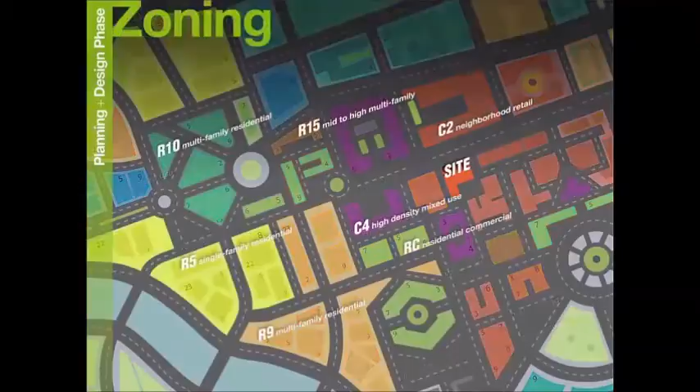We analyze existing architectural forms, the scale of the building, how it relates to the city and pedestrians, and existing infrastructure like transit and utilities.

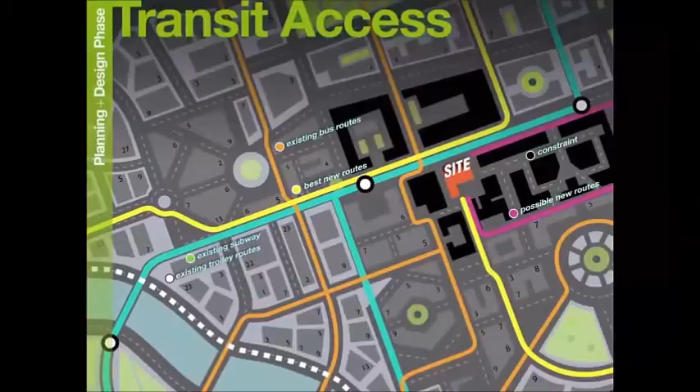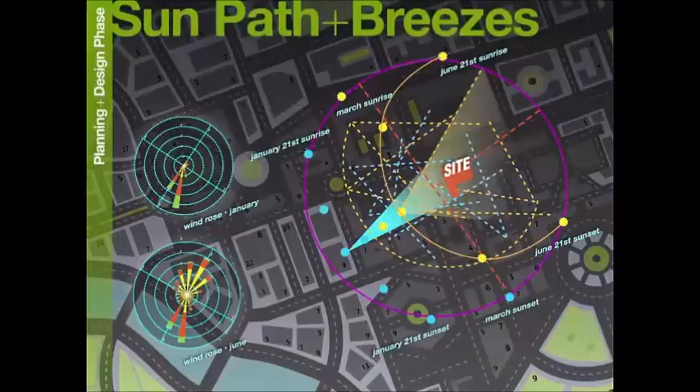We study all lines of sight and overall visual impact to enhance user experience. We consider how sun path strongly influences orientation of the building to maximize daylight and minimize operational costs.

As we determine the orientation of the building and begin developing a design, we carefully consider how people will experience the building, circulate within it, and get out of the building.

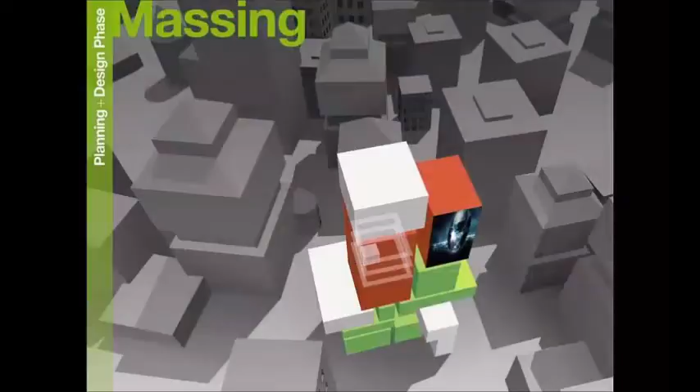We develop numerous conceptual designs to fully explore possibilities, while considering a wide range of building science issues like water management, keeping water out, directing it away from the building, and potentially reusing it for the surrounding landscape.

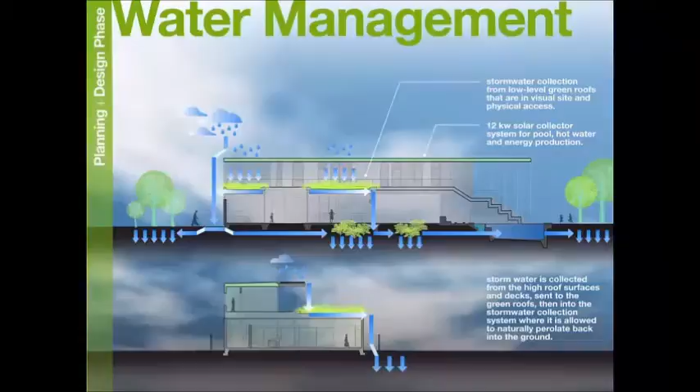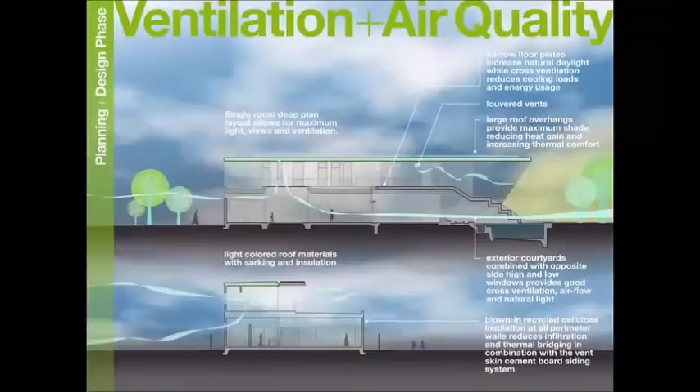We analyze wind loads, seismic activity, handicapped access, and other factors that directly affect the health and safety of the public. We work to capitalize on prevailing winds, airflow, and air quality, as well as maximizing daylight to lower operational costs.

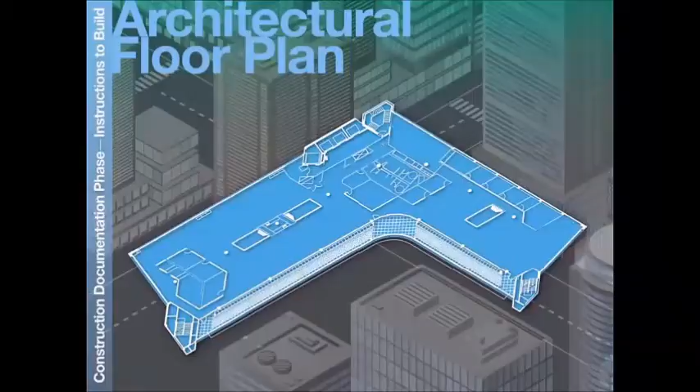We integrate technologies that will complement the efficiencies of the design. To construct the design, we prepare comprehensive documents for the contractor and for obtaining all required approvals. These start with the architectural plans, elevations, construction details, and detailed technical specifications.

We work with our engineering consultants to develop coordinated plans for the engineering systems, such as structural, mechanical, electrical, and plumbing. Integration gets pretty complicated.

We have to think about integration in all four dimensions, including how the systems are installed. We utilize technology to help us find clashes in the systems.

Once the instructions for construction are completed and all permits are issued, we help our clients interview contractors and discuss the technical aspects of the project.

We coordinate numerous inspections to ensure the building complies with code and regulations, and manage change order requests and monitor all costs to ensure an on-budget completion.

Once construction is completed, we reconcile all the changes that were made to the design during construction and provide our clients with a final set of as-built construction documents that the client can rely on and reference for the life of the building.

We don't walk away there. We can help our clients implement a maintenance and operations plan that will keep the building operating efficiently to retain its value.

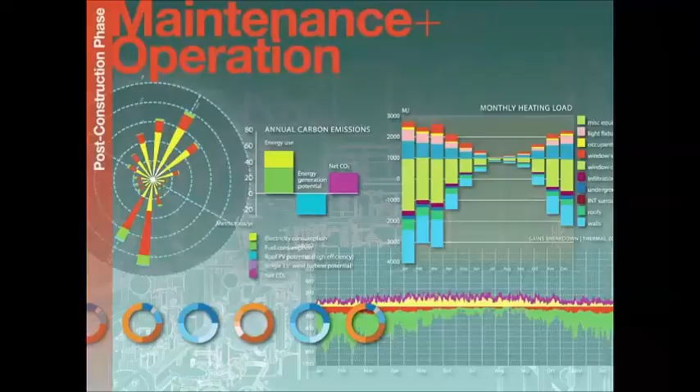We spend 95% of our lives in buildings. Architectural design has an enormous impact on the quality of every aspect of our lives. AIA architects are committed to providing the full range of services to guide our clients through every aspect of the design and construction process.

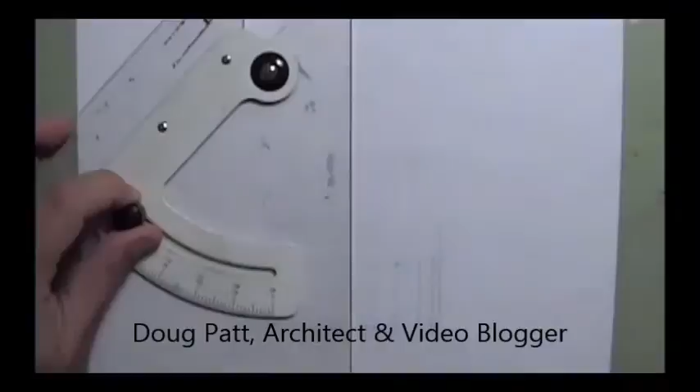A friend said to me the other day, architecture is a great profession and a horrible business. At times, I tend to agree.

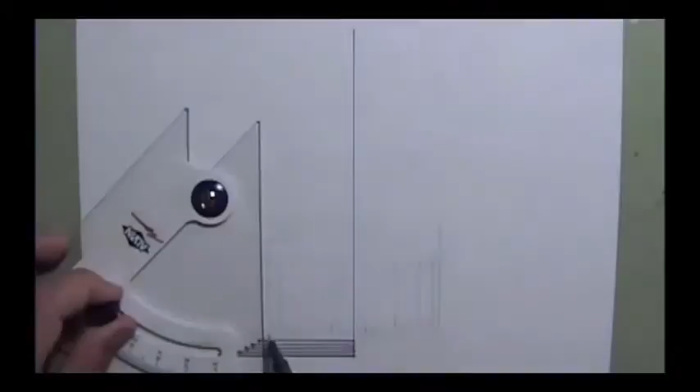What's great about the profession is what architecture is in history, what it aspires to be in the future, and most of all, what the training and doing exposes one to in life.

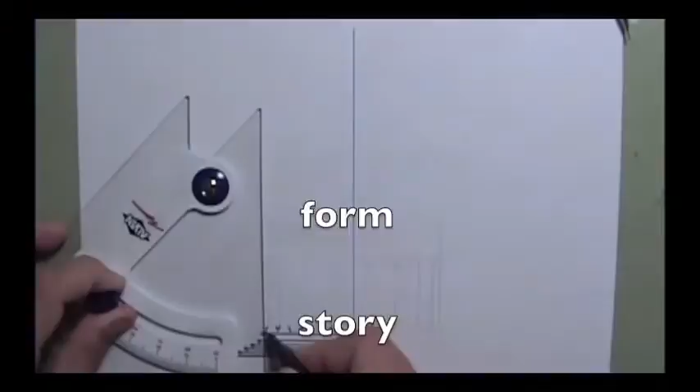Architecture is about many things. As I've said before, it's about making form, story, music, and inspiration. It's also about illuminating one's life with philosophy, sociology, psychology, material science, engineering, mathematics, history, construction, and in the end, making something out of nothing.

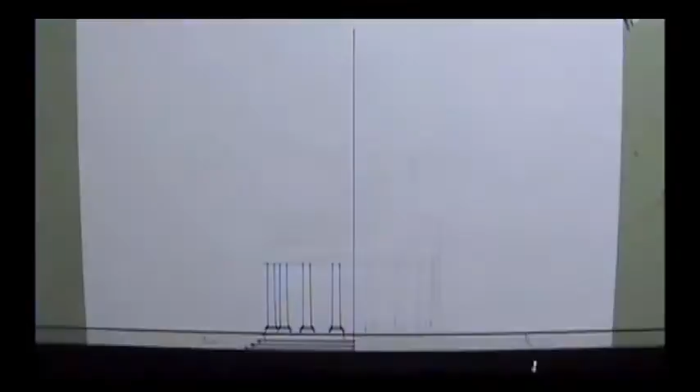These are the reasons architecture is a great profession that can enrich your life. That said, I've heard many complaints that the business of designing buildings, running an office, and keeping an architectural firm solvent can simply be overwhelming.

This can also be very true. From my experience, the education of an architect prepares one to become a designer.

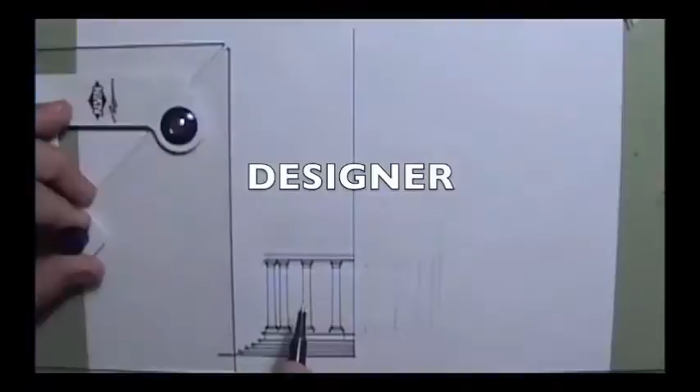But it may be that you simply do very little design work as an architect. The truth is, design is really a very small part of what the architect does. And unless you're in the rare position that you can dictate that design is what you focus on most, you could be in for quite a shock.

As I've discussed in other videos, the job of an architect involves doing a lot of technical drawing as well as research. It also involves an incredible amount of coordination and organization. Being an architect may also require polished people skills. The architect can work with large numbers of subcontractors and consultants, and should be able to work well with other people, particularly contractors in the field.

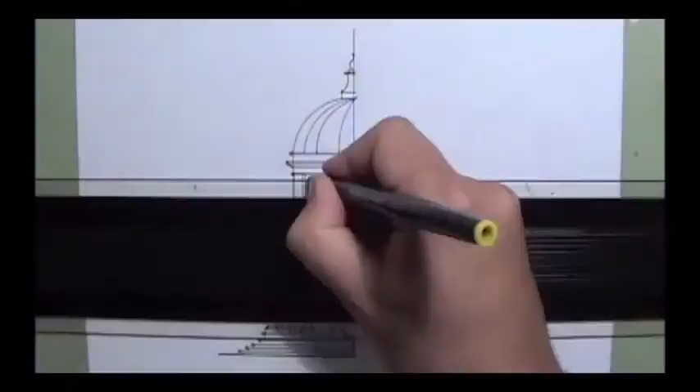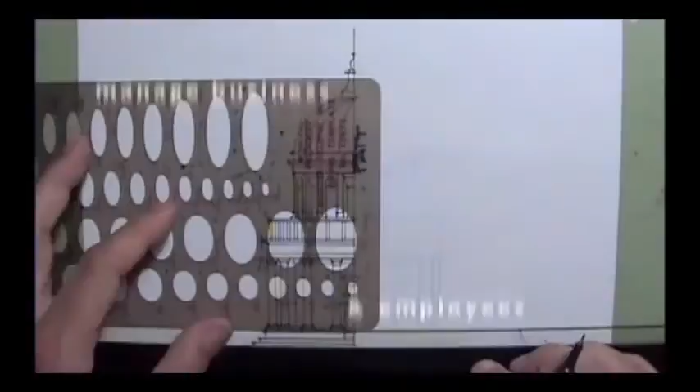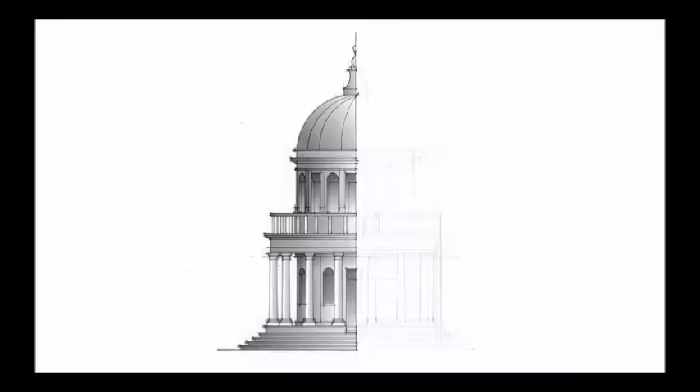Not to mention their most important job, managing the client. The architect also needs to be able to manage the business and employees if they've got them. In fact, all these jobs can be exactly what an architect does, with no time for design at all. This is why the business of architecture can be so different from the profession and, in the end, for some, unfulfilling. So, understand, architecture is many things, not just design.

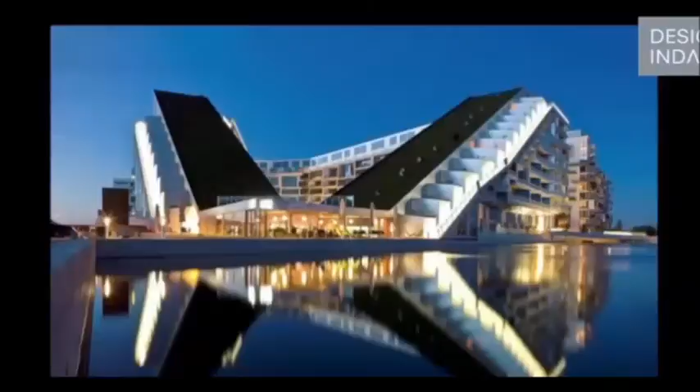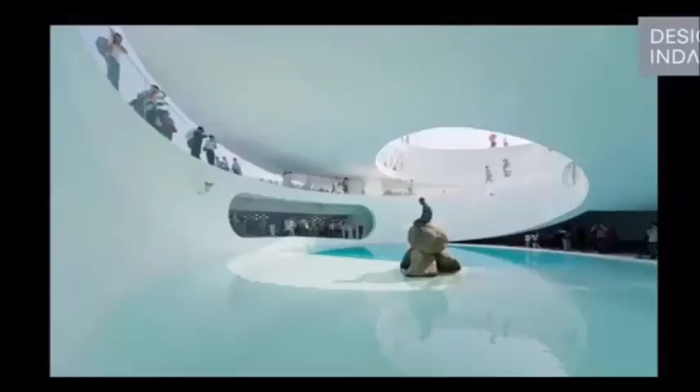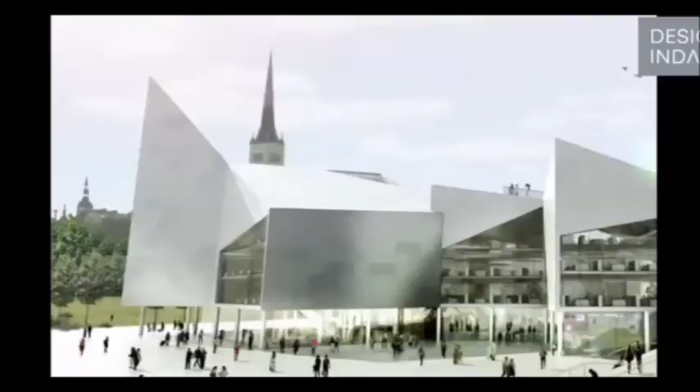I don't believe in this sort of idea of architecture as some kind of preconceived idea that you try to smash into the world with no regard for how it's going to be used or who's going to be using it. When you're doing a city hall, it's very much about, of course, a lot of practical issues and the invitation of the public, but it's also very much about the identity, in this case, of a post-Soviet democracy that really wants to be about political transparency.

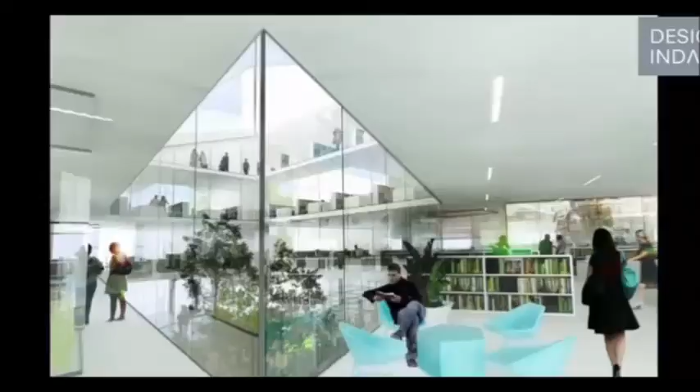We're not building for ourselves. We're not building spaces for ourselves. The users are the experts in using the buildings. And if you're doing a library, you need to speak with the librarians. If you're doing an urban space, you have to speak with the local population.

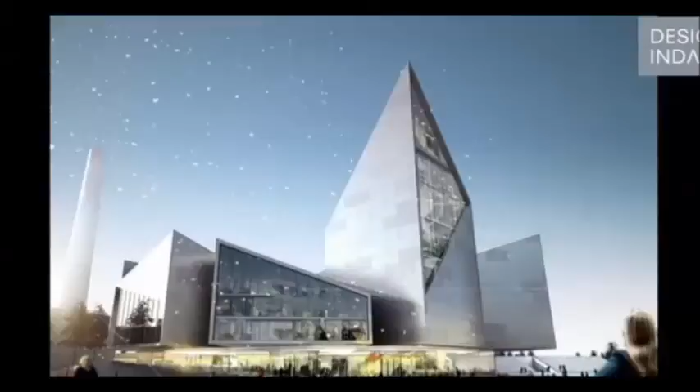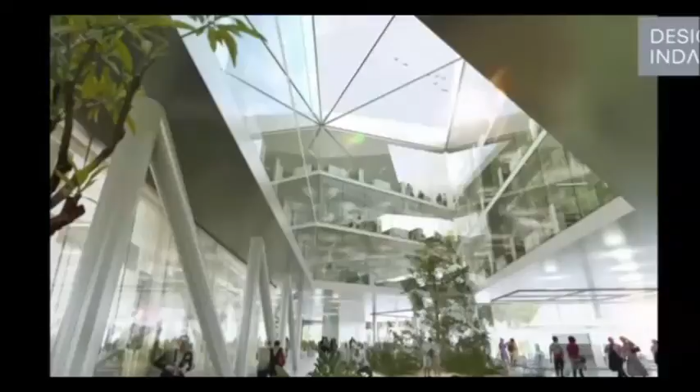We got invited to look at a competition for the City Hall of Tallinn, the capital of Estonia. So we thought, let's put the city council in the tower. Let's give them an incredibly generous space for the political debate. The ceiling is made as a gigantic mirror. So when politicians have to make difficult decisions, all they have to do is look up, and they get this perfect periscope overview of the city that they're messing with.

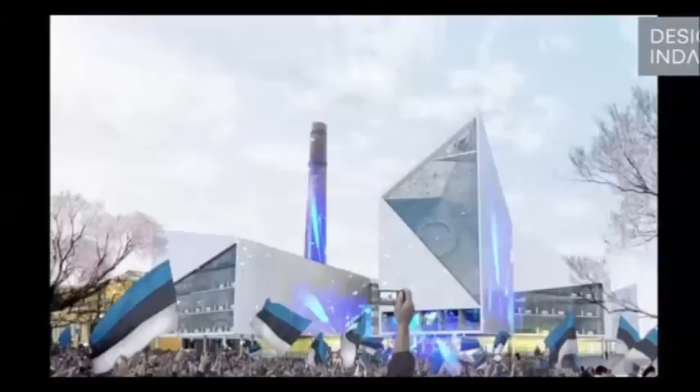As a side effect, when the angry citizens gather to demonstrate, they get this perfect bird's eye view. They can see if some politicians are sleeping or absent or doing dirty deals or playing Angry Birds on their iPhones.

When we're doing a building, we're not just happy with solving a standard apartment and then repeating it 10 times to the left and 5 times up. Then we have a nice stack, and we repeat that a series of times. Then you've solved only one problem, which is how to organize an apartment. But you didn't create a community, you didn't exploit the views, and you didn't pay any respect to the neighbors. Our buildings look different because they perform different.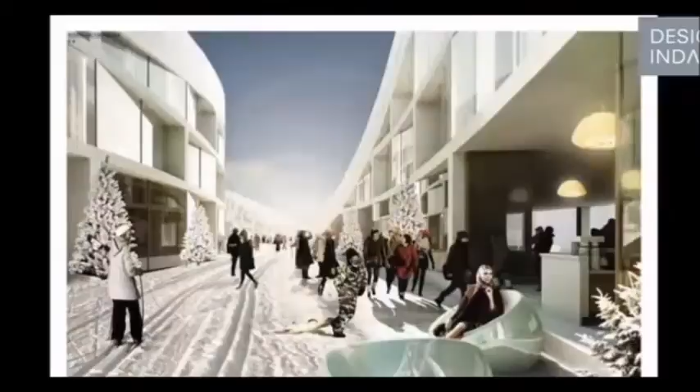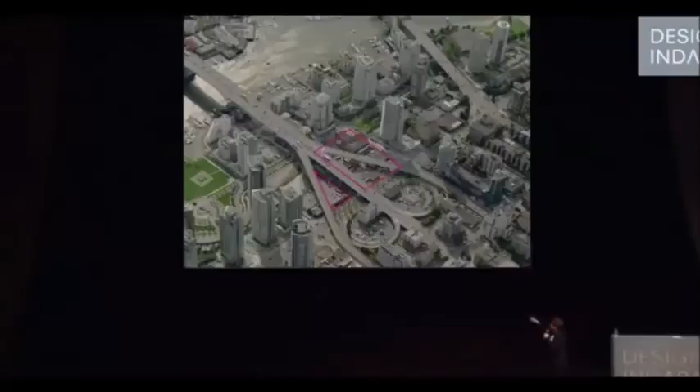What makes the Vancouver Tower look special is that it's maximizing the real estate investment in a very difficult site. The site is totally tortured by this highway bridge. Also, there was a park right next to the site where we're not allowed to cast shadows after 10 o'clock in the morning. So we started mapping the constraints.

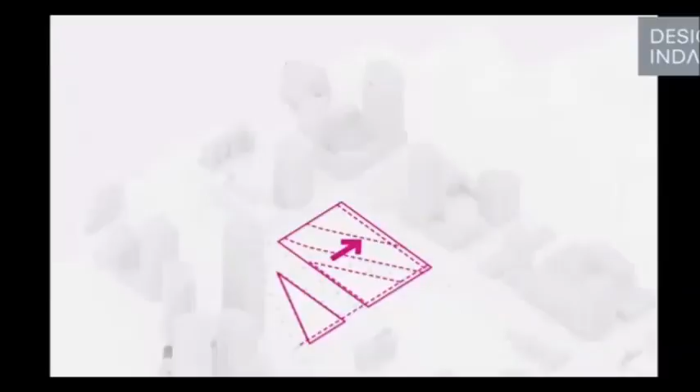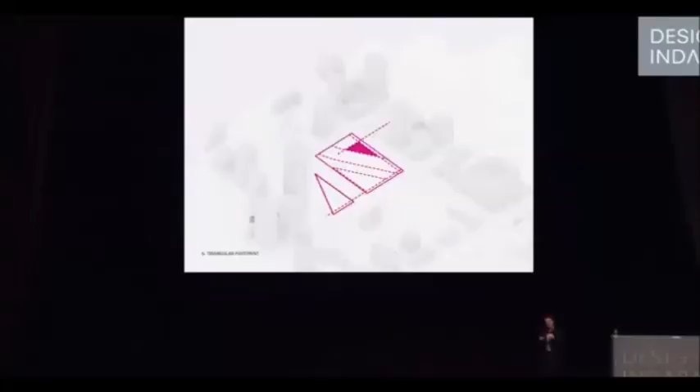There's a setback requirement from the street, there's another setback from the highway. Then there's almost a deal breaker, which is a 30-meter setback from all of the highways, because the city doesn't want anybody living and looking straight out at cars. And finally, because of the park, our footprint is reduced to a tiny 600 square meter triangle, which is almost too small to build.

As soon as you know what this building is going to do, you can start, and who's going to be using it, and how they're using it, what are their complaints of where they are now, what are they dreaming about for the future. Then you can start informing your design decisions with information.

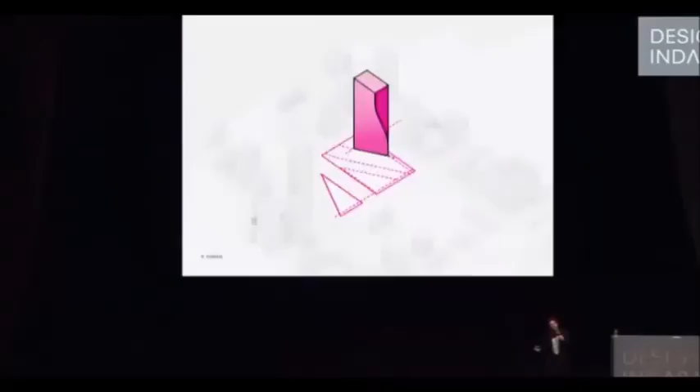But we thought, since our client owns the whole site, as soon as we come up in the air, we can come back out and basically maximize the amount of the nicest apartments. So basically, as you drive over the bridge, it's like somebody pulling a curtain aside, welcome to Vancouver.

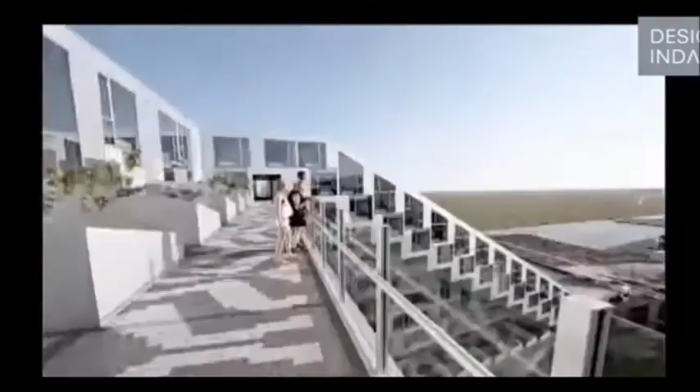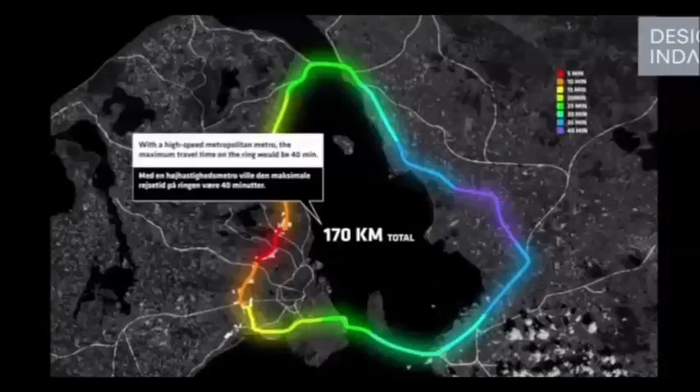Resource consciousness is for the real world. In the design studio, the more garbage you produce in the design process, the less garbage you end up building. And in that sense, following what you enjoy in many ways is what could turn into something that could be read as talent or capacity.